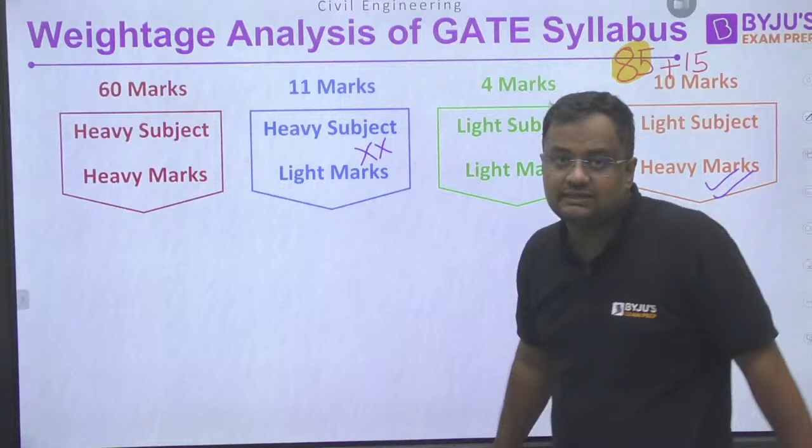Guys, in any case, if you have missed any of the topics from this part, that can be done. And this heavy subject but light marks topic should not be done in last 30 days if you have not done till now. Heavy subject and heavy marks are fluid mechanics, environment, geotech, transportation, mathematics and so on.

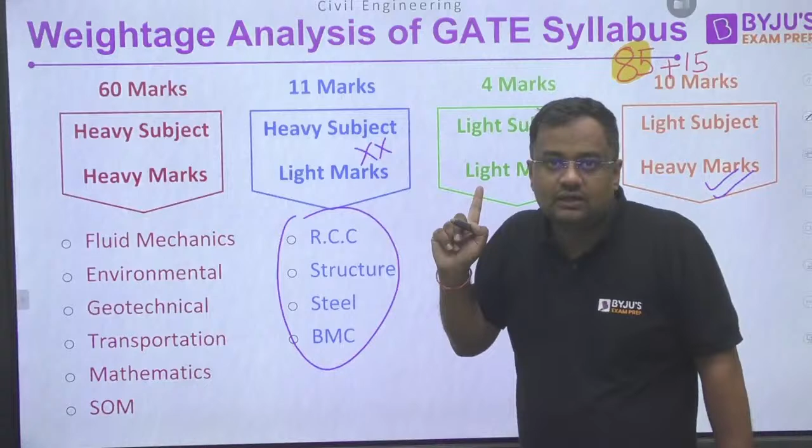Heavy subjects but marks are less are RCC, structure, steel, BMC, having a huge syllabus but comparatively in GATE exam the weightage is less. Of these subjects in engineering services, weightage is quite high, but in GATE syllabus of these subjects is high while weightage is less.

Light subjects with less weightage and less syllabus are hydrology, irrigation, engineering mechanics, and also PERT CPM. And light subject but heavy marks are OCF and survey. That has to be done, guys. If you have not done till now, you can cover them.

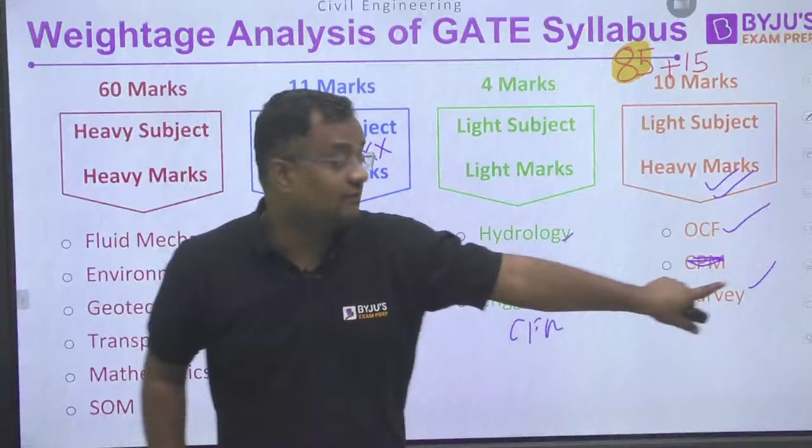These subjects can be done in 3 days. Okay, in 3 days you can do this. And what topics have to be done, that I am telling you.

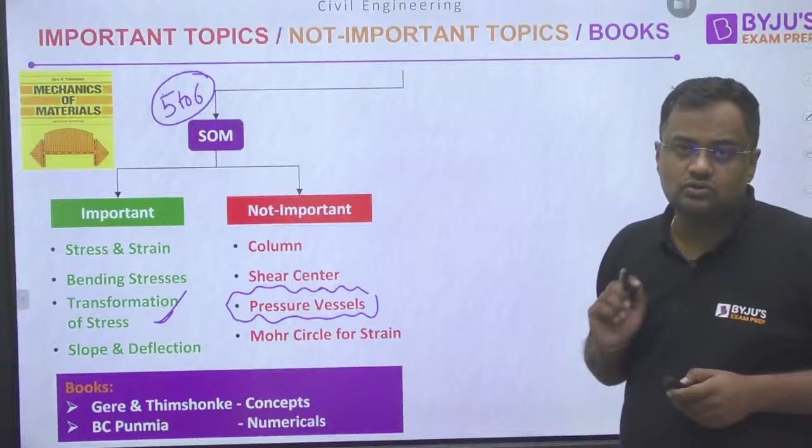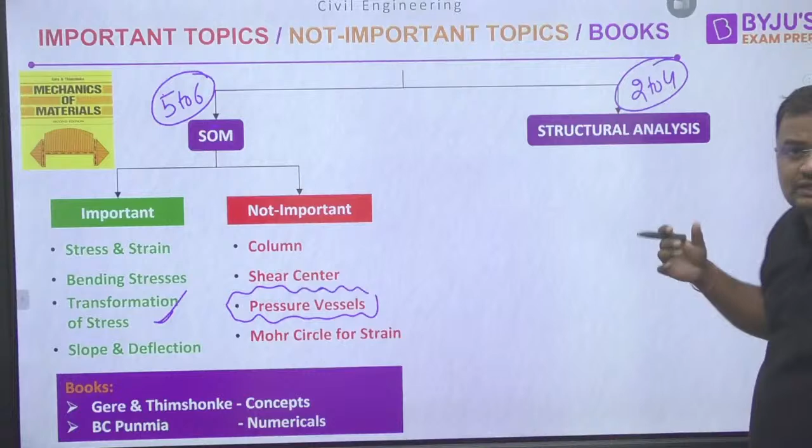Now, guys, for structural analysis, heavy subject. If you have not done this subject, this will be coming for around 2 to 4 marks. If you have not done this subject till now, guys, I recommend you not to touch this subject. It is a huge syllabus but comparatively less weightage. Important topics, if you want to do also, then do only these: influence line diagram and indeterminacy, even you can leave truss also.

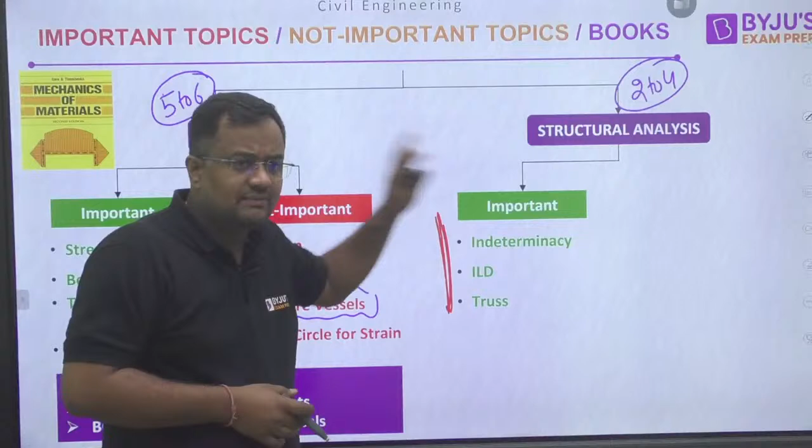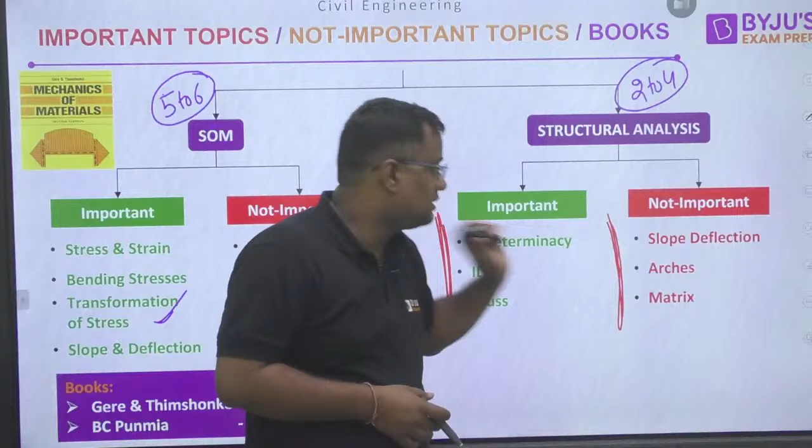Okay, and this is not an important topic. Although slope deflection is very important for engineering services, especially subjective exam, but for GATE exam it is not that important. Now books are Ramamrutham and R.C. Hibbeler, the best books for understanding the concepts and numericals of structural analysis.

Now, guys, next is RCC. Again, a very huge syllabus, but comparatively weightage is not that high. Syllabus is high.

In beam design, shear reinforcement, pre-stress - 90% chances that a question is asked from RCC will be from here. Beam design means: first calculate the actual depth of neutral axis, then the critical depth of neutral axis, then moment of resistance. Shear reinforcement, vertical stirrups, bent up beams, inclined bars, bent up bars, pre-stress concrete - the question can be asked from these.

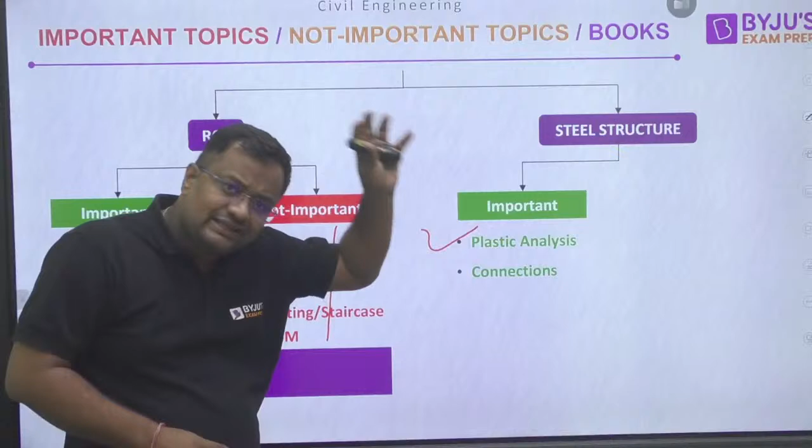Now for steel structure, even if you have not done this till now, only go for the plastic analysis, nothing else. If you have not touched steel analysis, only do this topic, and that can be done in 5 to 6 hours. Connection and others are not important topics for the GATE examination.

Book is S.K. Duggal. Before coming to soil mechanics, which has the highest weightage in the GATE exam - around 14 to 16 marks. Out of this, 11 to 13 marks will be from soil mechanics, and 3 to 5 marks is coming from foundation engineering, that is shallow and deep foundation.

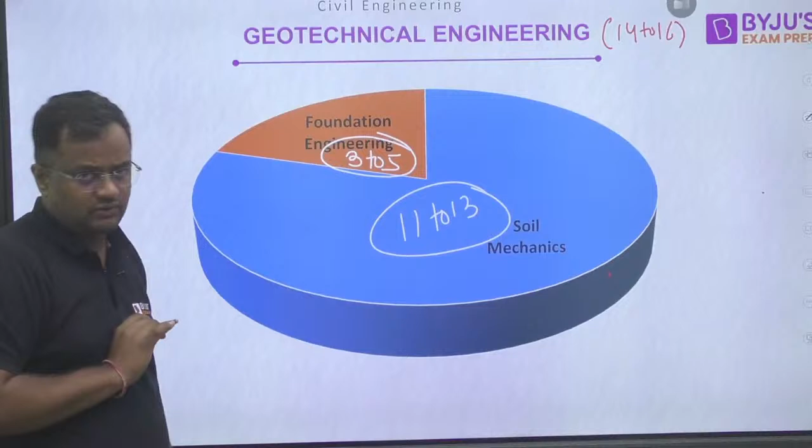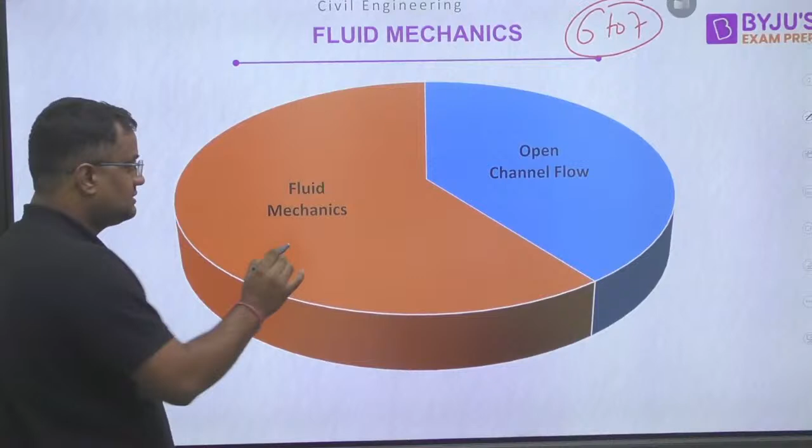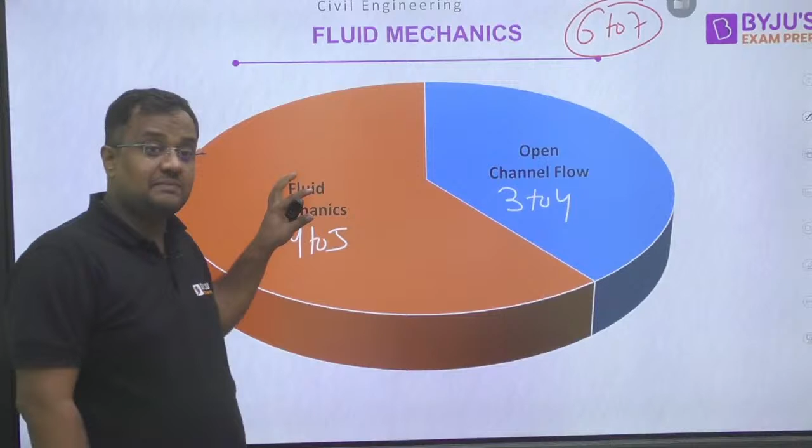Fluid mechanics is coming of 6 to 7 marks. For mechanical, fluid mechanics is coming of 11-12 marks, but for civil engineering it is around 6 to 7 marks, of which 4 to 5 marks will be here and 3 to 4 marks from OCF. So even with the very less syllabus of OCF, it is coming of high weightage. Syllabus of fluid mechanics is 6 times more than OCF, but weightage is almost same. So if you see weightage per unit syllabus, OCF is quite high scoring.

Now fluid mechanics important topics are written here, you can do these. Not important topics are fluid kinematics, weir notches, Hardy Cross method, turbulent flow.

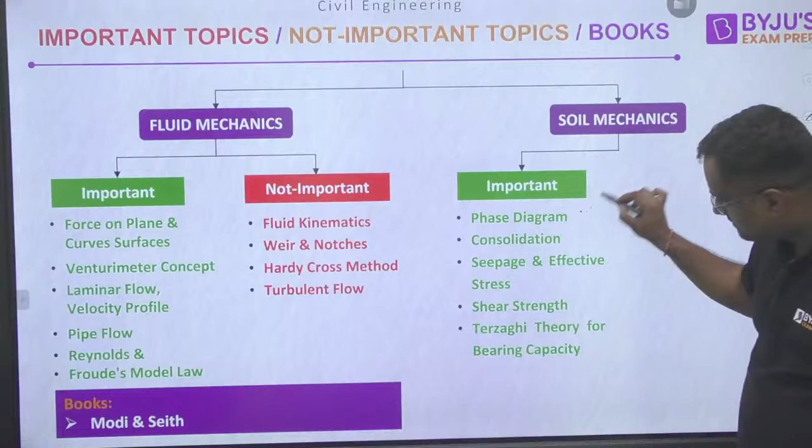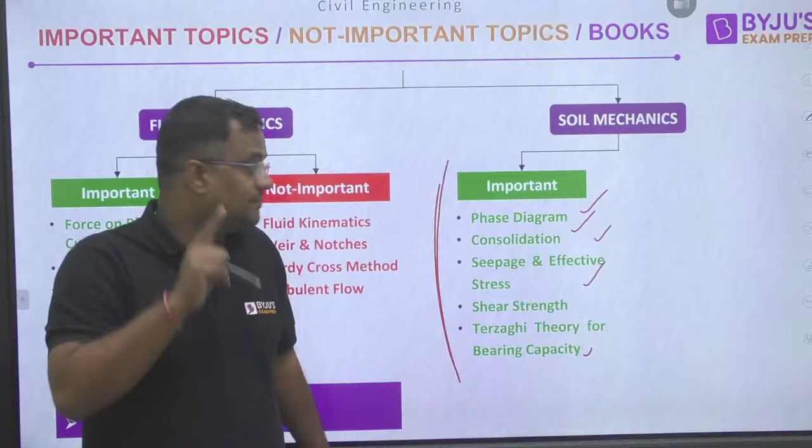For soil mechanics: phase diagram, consolidation, seepage, effective stress, shear strength, Terzaghi and bearing capacity - 90% chances that questions will be asked from these topics. Topics like clay mineralogy, compaction, soil exploration, vertical stress below soil - although the question has been asked once in the past 2-3 years, those are not that important. Vertical stress, slope stability, compaction and soil exploration are also not that important.

Book is Gopal Ranjan Rao. Now before coming to transportation and survey, let me tell you the weightage of transportation is quite high - 8 to 9 marks. Earlier in my time in 2012, the weightage of transportation was only 4 to 5 marks, but now the weightage has been increased.

But out of that, 90-95% questions will be coming from highway. Railway might have no question asked, or one question of 1 mark. Airport also the same - either no question or a question of 1 mark.

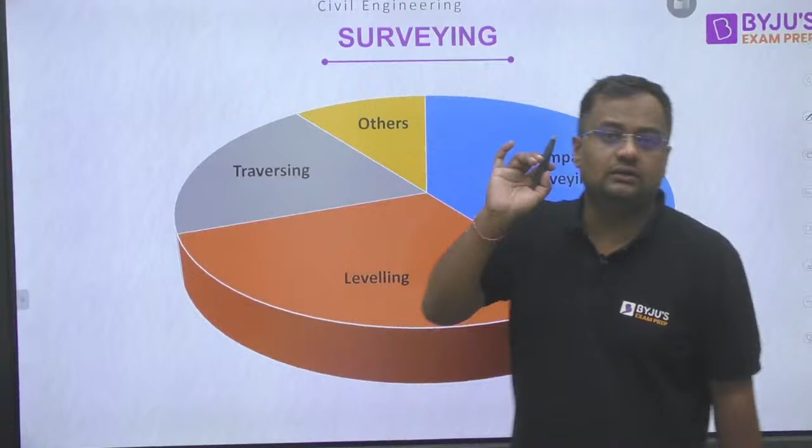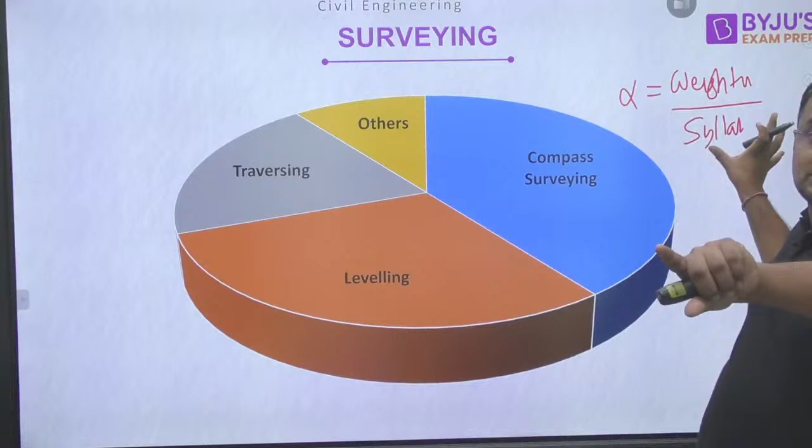For surveying, it is very high scoring. And if I say a factor called alpha, that is weightage of a syllabus with respect to syllabus size, then alpha of survey and OCF are higher than even soil mechanics and environmental engineering - weightage per unit syllabus. Because for soil mechanics and environment, if weightage is high, the syllabus is also high. For surveying, let me tell you - leveling, compass and traversing, these 3 chapters - 99% questions will be coming from these 3 chapters.

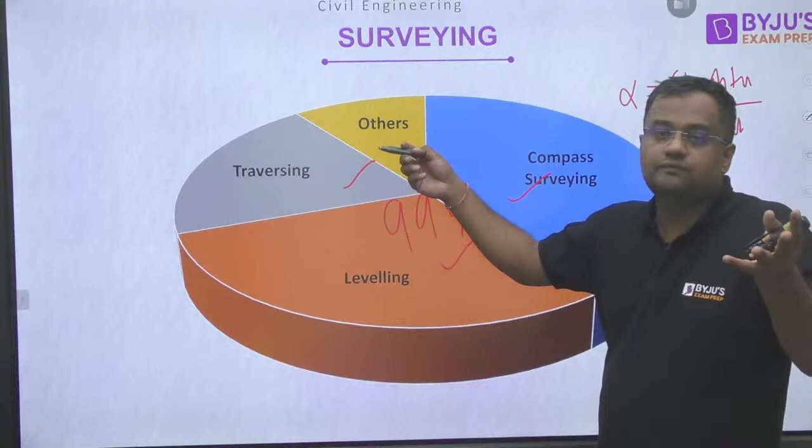Other chapters - chain surveying is not that important, forget it. Chain surveying, plane table surveying, GPS, GIS, remote sensing, theory of errors - question may be asked either 0 to 5%. 90% questions will be asked from leveling, compass and traversing. From other topics, only 5 to 10% questions.

Of these 2 subjects, highway and survey - the important topics of highway are sight distance, superelevation, Webster method, capacity of highway, particularly Greenshields model, Qmax is equal to VF into KJ by 4. Not important topics are setback distance, which has not been asked for many years now. Length of vertical curve is not as important as superelevation and sight distance in geometric design, and pavement design - Burmister, California method and all.

This is not just a book, it is a granth (scripture) of highway engineering.

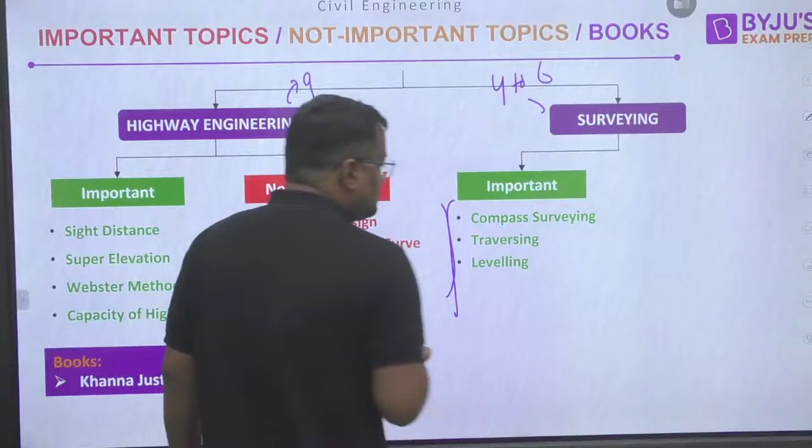For surveying, 90% questions will be asked from this - it's coming of around 9 marks, surveying around 4 to 6 marks. 90% questions will be asked from these 3 topics - compass, leveling and traversing. 10% questions from remaining topics. Book is B.C. Punmia.

Now engineering hydrology - in GATE, questions will be asked from hydrograph, infiltration, risk reliability, 90% from these topics. And factors affecting evaporation, precipitation, measurement of precipitation, missing data, Thiessen polygon - 5% or 10% questions will be asked from these.

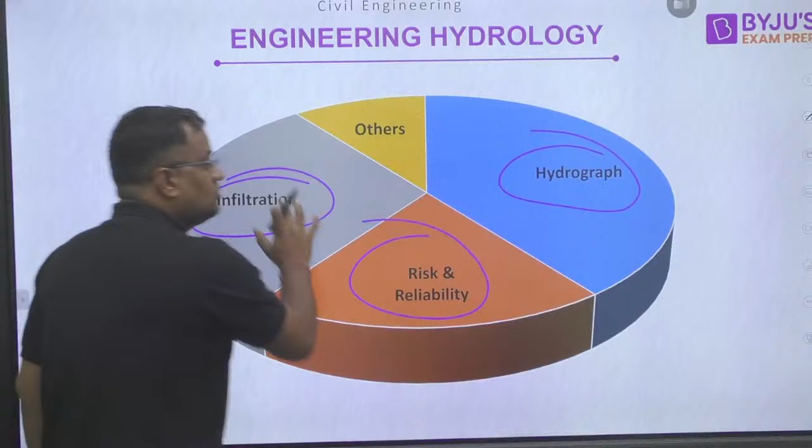90% of questions in GATE hydrology come from this topic. Precipitation and evaporation questions are asked in engineering services prelims, but in GATE there's less chance. In hydrology, infiltration, phi index, W index and Horton's method are important, along with hydrograph, risk and reliability. Precipitation, evaporation and groundwater hydrology are not that important. This carries around 3 to 4 marks.

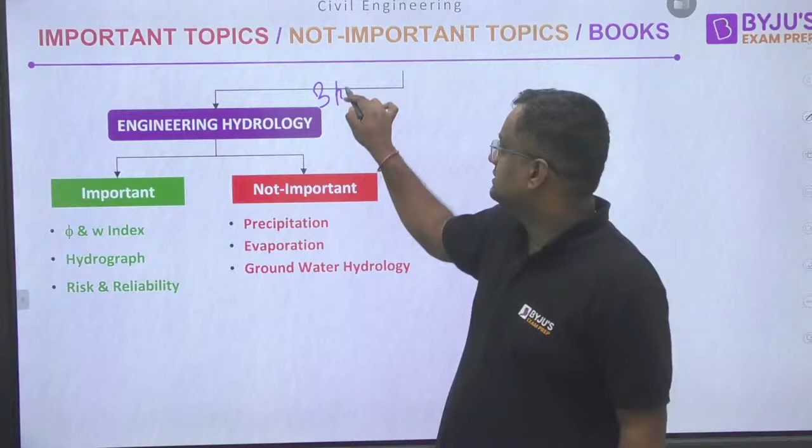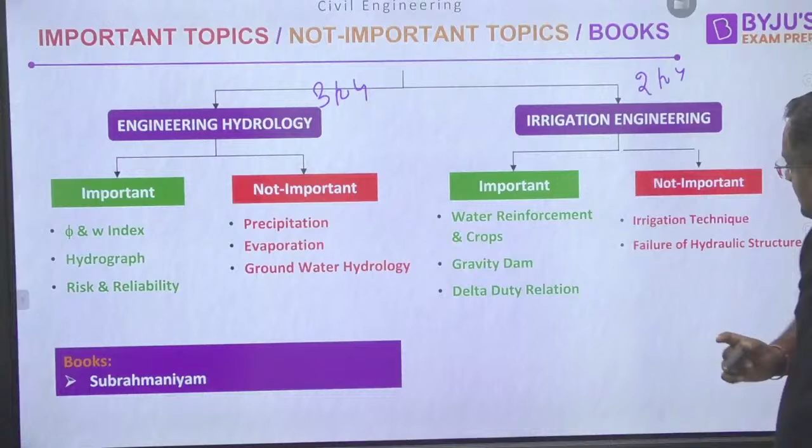Irrigation engineering carries 2 to 4 marks. The important topics are water requirement of crops, gravity dam, and delta, where delta equals 8.64 B by D. The wilting point formula is also important. Irrigation techniques and failure of hydraulic structures, spillway, cross drainage, etc. are not that important.

Okay guys, are you coming from 9th for the marathon?

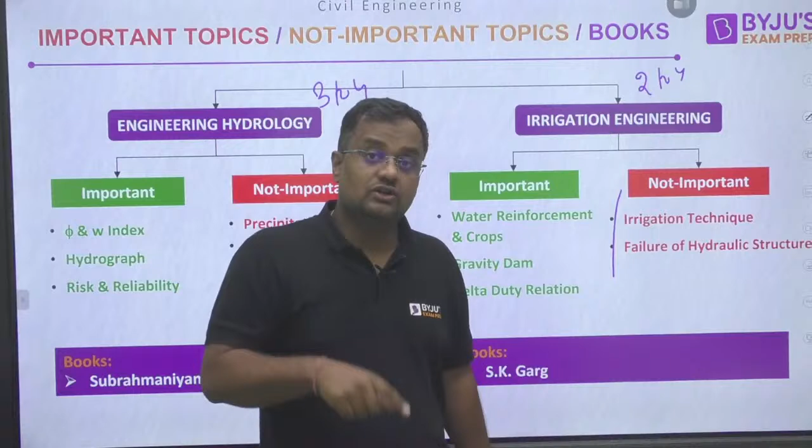Now guys, environmental engineering is again a high weightage subject, around 11 to 13 marks. Important topics are raw water treatment, characteristics of wastewater, sewer system and filtration - not air pollution. Solid waste management you can take at a mediocre level this time; air pollution is not important, but solid waste management you can take at a mediocre level.

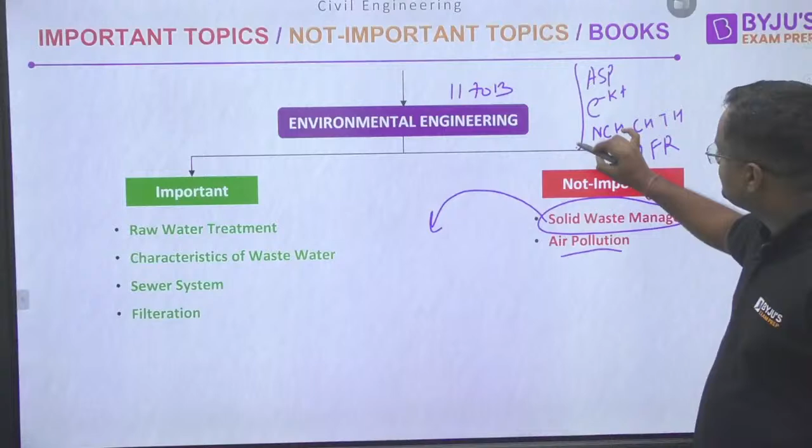Now I already told you guys what are the heavy subjects in this. So guys, any doubts now? I am available for your doubts, guys, you can ask me.

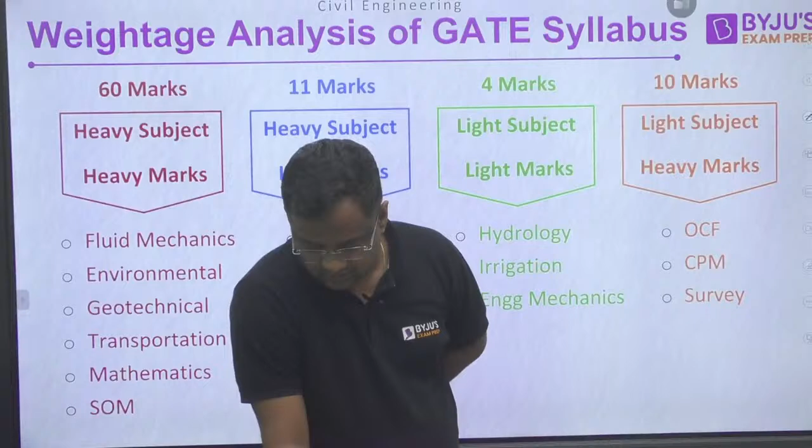Any more doubts, guys? I'm waiting for your doubts, guys. You can ask me if you want.